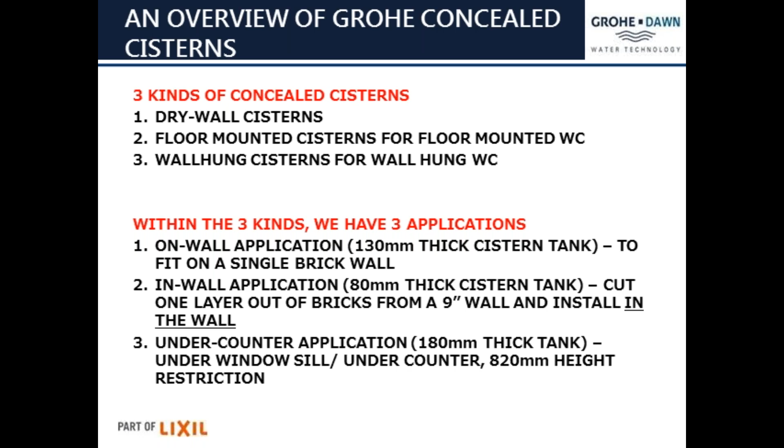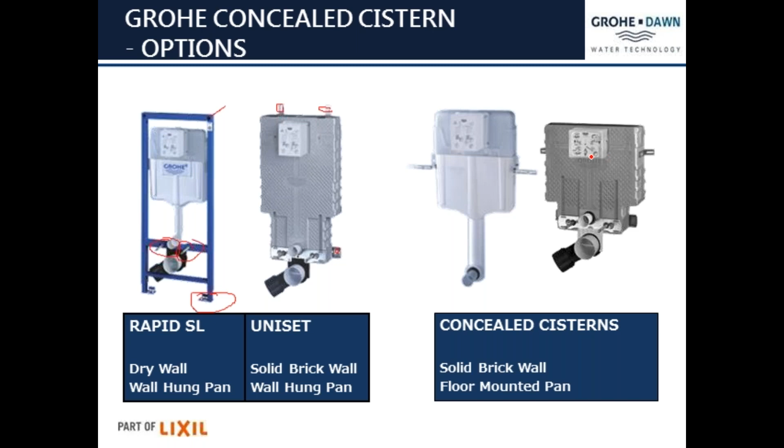Okay, so if we have a look at our Rapid SL frame, we can see that it's a tool-free installation of your inspection chamber. So it's not like the old ones we used to have, where you had to turn screws in and fasten it down and all that type of thing. It simply clips into place.

Then there are only two screws for the retaining frame. So once your tiling or inspection chamber has been clipped into place and it's now being tiled around it, you cut it open, and then you have 2 screws to put your retaining frame on. Also, if you have a look at the 2 brackets, that would then be those 2. It's a perfect quick adjustment with a new wall holder, and it goes very quick.

Obviously, you'll need some tools there. Yes, you'll need some tools to drill it into the wall and so forth, to hang it on, but after that, it is very, very easy. If you have a look on your catalog, that is the catalog Sanitary Systems, Work Smarter. It is on page 61. You'll see the bracket there is a 3855800M.

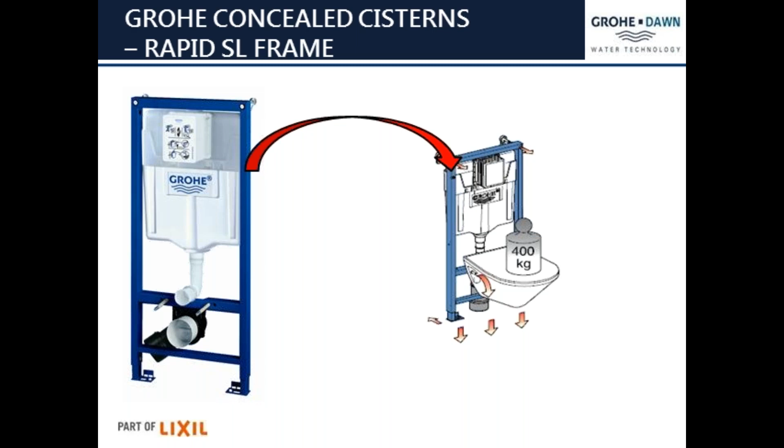As we said, you only have a very limited amount of tooling needed to assemble this holder. Just because it's very easy to mount and clip together doesn't make it any weaker. We've mentioned previously when we spoke about the sanitary ware that a wall hung pan needs 400 kilogram weight put on it to comply with SABS, and your Rapid SL frame complies completely to that.

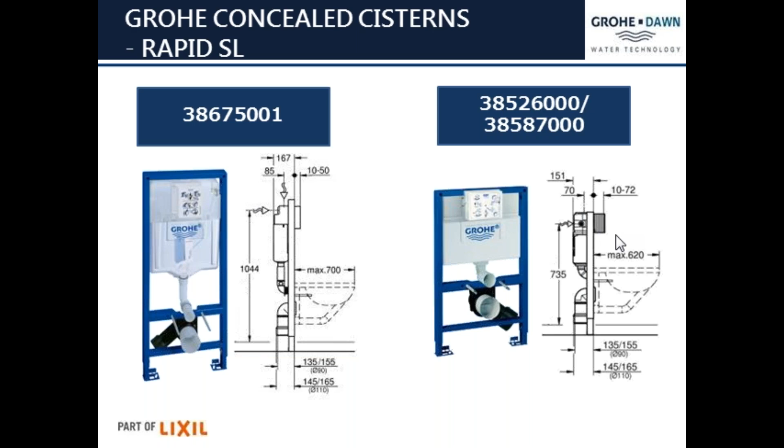So there you can see on your screens the different codes of the different systems that come with a Rapid SL. The one on the left-hand side, the 5001, is the normal 1 meter installation. Then you have your 26000 and 87000, which are your under-basin or under-counter ones, where you can have either a top flush or front flush activation. The 5001, you can only do a front flush activation.

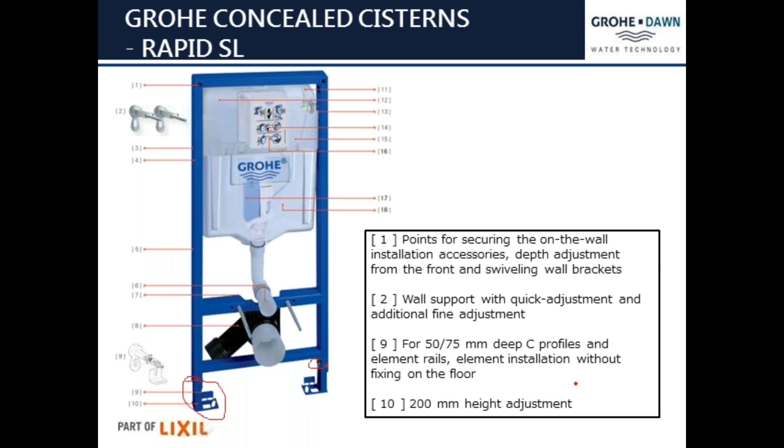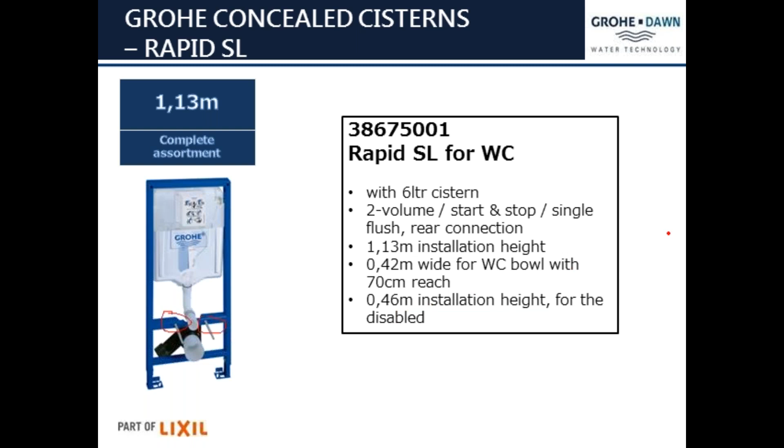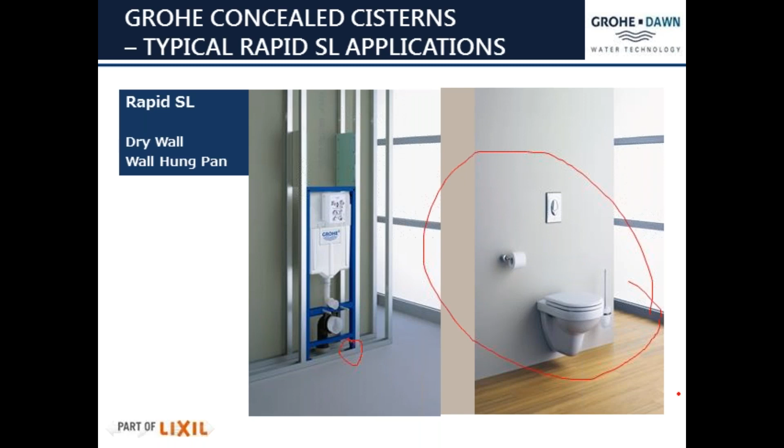But if this was a single channel, then you could actually put a screw or that adjustment kit through to the back wall. Obviously, once you take this whole installation and cover it with a second skin, this is what you will see in front of you. The whole system and the frame, the feet, everything are hidden, and you've just got the wall-hung toilet that now hangs on there.

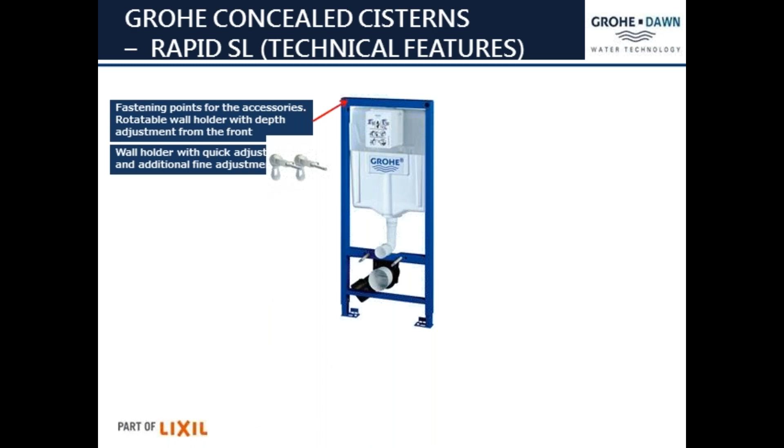So if we have a look at some of the technical features of the Rapid SL system, first of all, you have your fastening points for your accessories, your wall holders to give you depth adjustment and so forth. Those are your depth adjustments with adjustable brackets that give you that quick fix adjustment. You've got sound insulation around your flush pipes and so forth to give you that whisper, so there's not much noise.

And then obviously on your bolts you have got your 400 kilogram load capacity for any of your wall-hung type toilets. You have got your elbow with a 90-degree bend, so it will give you the same as a floor entry or S-type installation.

The frame is coated on the surface with powder coating. This makes sure that you have longevity. It's not going to rust or corrode inside of your drywall area.

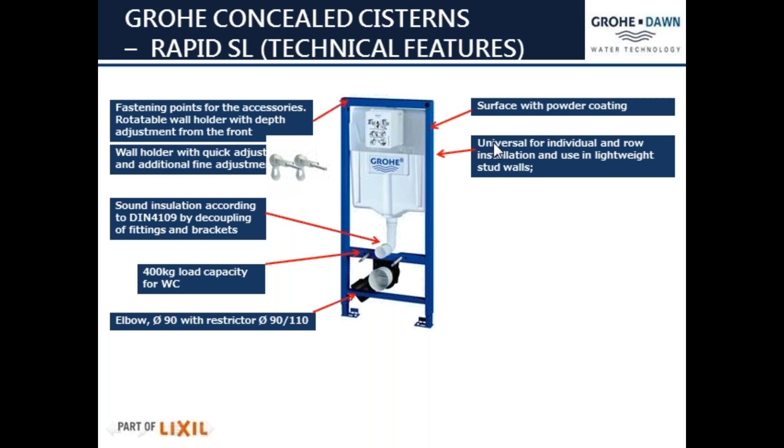So you've got your universals for individual and row installations. On the unit, you've got marks to show you what your standard height should be and where it should line up.

You've also got fastening points for your wood stud partitions and element paneling. We don't really do much element paneling here in South Africa, but we do have some wooden houses, and those would be points where you ideally fasten it onto the wooden studs of the wooden house.

And then you've got your 200 millimeter extra quick adjustment just to lift it that little bit if need be.

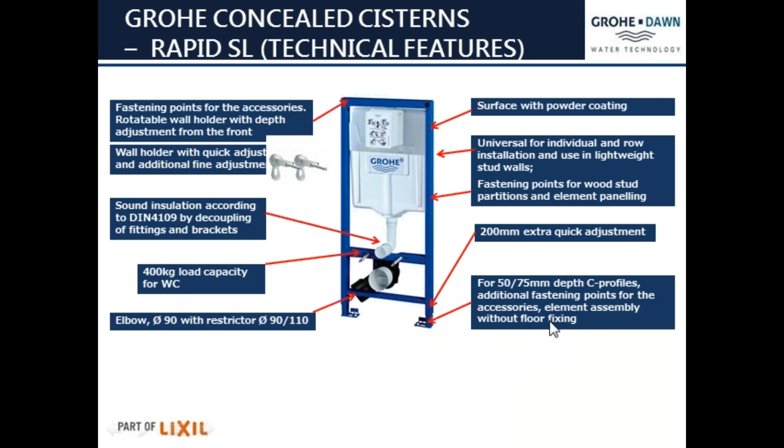Then for your C profiles, as we said, those little feet at the bottom would just clip in and you don't have to screw it down in there at all.

Your filler valve fills up to 6 liters volume in 30 seconds.

Now, I want to give you a cautionary note here. Don't ever tell anybody it takes only 30 seconds or 40 or 80 seconds to fill up, because that is largely dependent on the actual pressure in the system, how dirty the strainers are, all that type of thing. So if you tell the customer it takes 30 seconds to fill, you get customers who stand there with a stopwatch, and if it takes longer, they'll phone the service department and complain that their system takes too long to fill. So rather be very careful specifying how long it will actually take to fill.

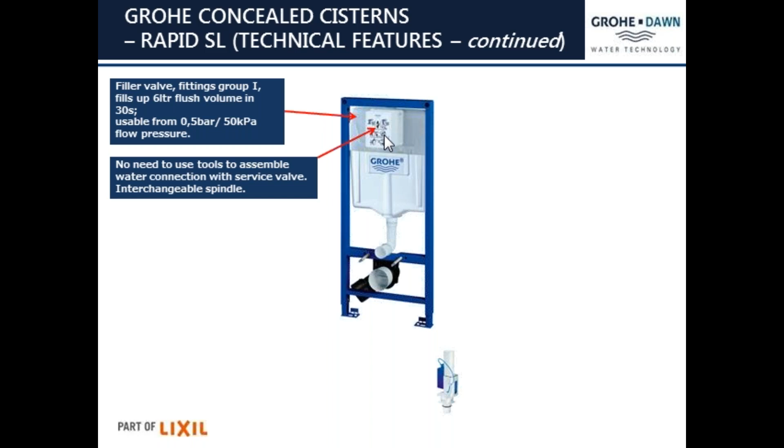So we mentioned that it's a quick fix. You just clip your tiling box inside there, and even the filler valve, the hose that's inside there, is a very quick, easy connection. You don't need a spanner to tighten it at all, you only need to push it in. There's a little O-ring, and then there's a little nut where you can just tighten it finger tight. You don't have to force tighten it there at all.

On your QR code, which is printed on there, it will take you directly to the website with all that information of installation instructions, all that type of thing. I don't know if many of you have worked with a QR code - it's very interesting. If you've got a QR code reader on your phone, you point it at that, get it to focus, and it will automatically take you to the website or whatever area that is pointed to. In this case, it will be to the website, to the professional section, where it'll give you all the information.

So in addition to the 6-litre flush volume, there's always a 3-litre volume available in the bottom. So the cistern can actually take 9 litres of water. You will flush with 6 litres, but it will always have a reserve of 3 litres. So if you need to push the button and hold it open a little bit longer just to get that extra little bit of a flush, there is an extra 3 litres available inside there.

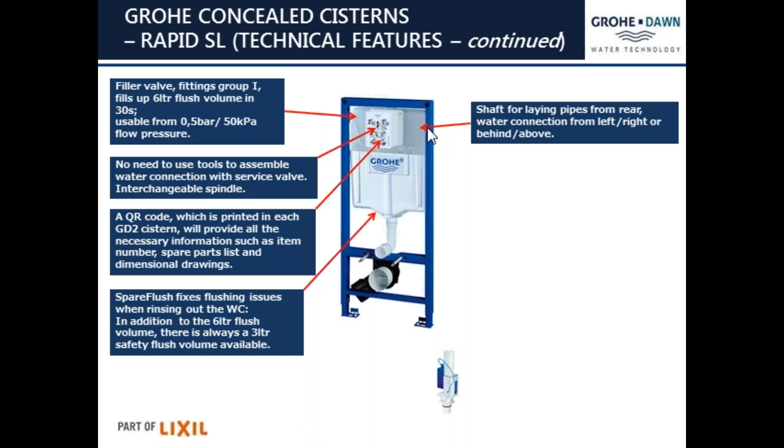You will also see that in your cistern you've got punch holes, so you can actually make your water connection of your filler valve either from the left or from the right hand side, or from the top or from behind. So it's quite flexible in your actual connections on that section there.

Depending on the tile image or design specifications, the toilet actuator plate can be mounted either horizontally or vertically on this particular cistern setup with the Rapid SL here. There are some of the others where you cannot change it at all.

The next one is the inspection chamber, which is locked in place without tools, and the retaining frame is secured with only 2 screws. So once again, very easy to install and to use.

The pneumatic waste valve, or what we know as a beta type valve, has got 3 functions: dual flush, single flush, and a start-stop function. So it's very nice if you accidentally push the full flush and all of a sudden you want to stop it because you realize you don't need the full flush - you can interrupt it and it will stop.

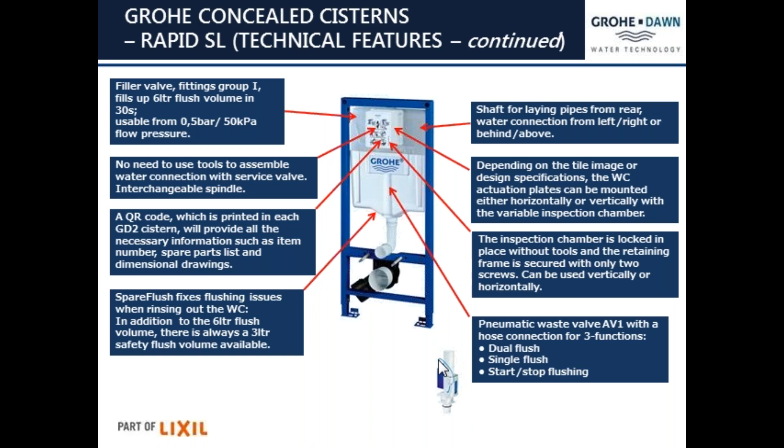The Rapid SL for the under counter or under windowsill installation - there you can see what it typically looks like. In this case it's an under counter, mounted up against the wall, with a false bulkhead of drywalling built in front of it, so it's still a normal wall hung installation with a little ledge behind the toilet. This could also apply where there's a window opening just above the toilet - it would be very similar.

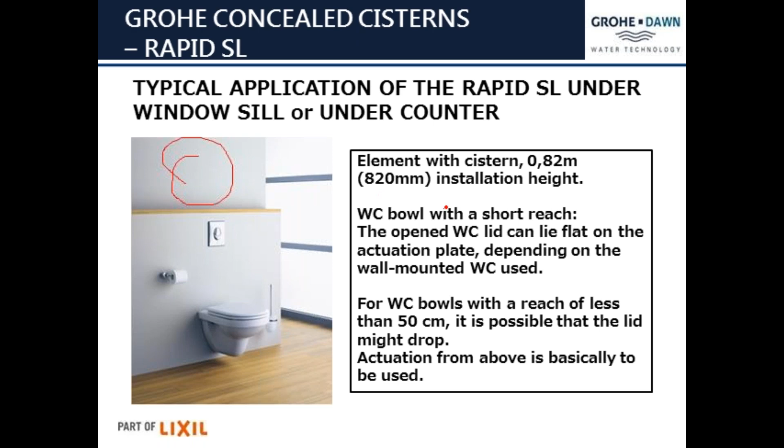A quick question here: on a wall hung pan on drywall, which cistern would you use? And there it is, your Rapid SL. This one is the 0.82 meter installation, so this would be an under counter, top or front flush - you would use this one here.

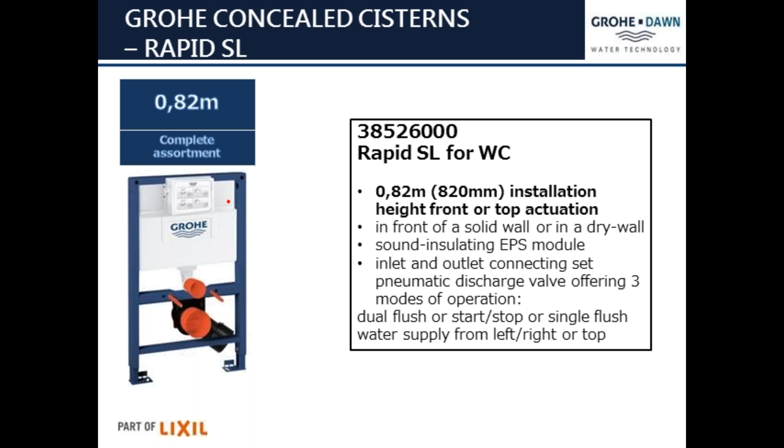You'll see this one has got the bigger foot at the bottom. The rest of the cistern looks exactly the same, with the same features - just the foot is bigger, and that would be for a different drywall sectional installation.

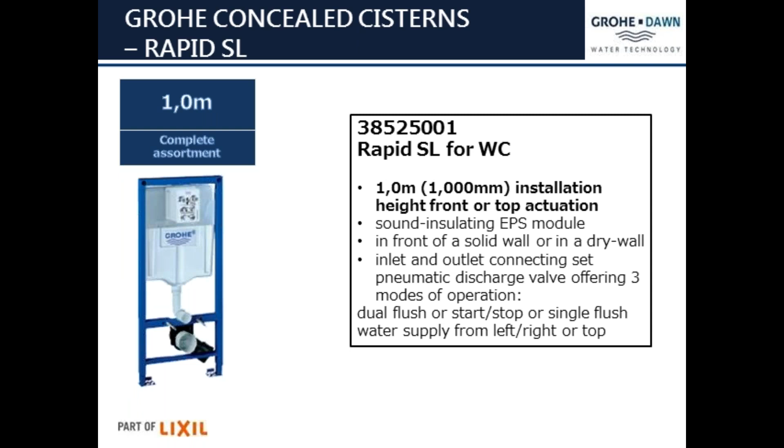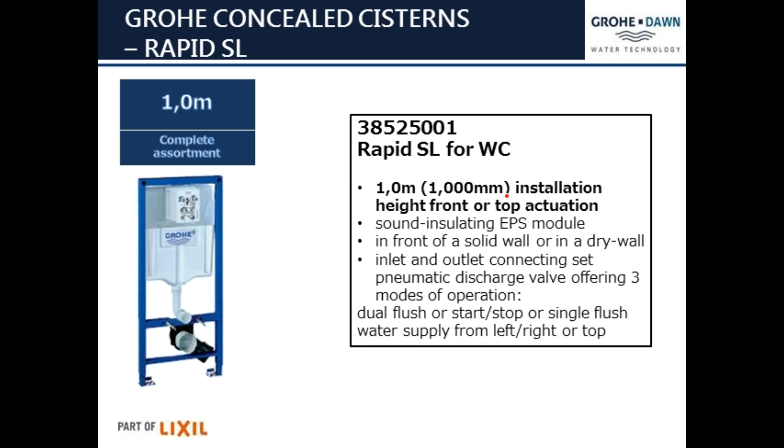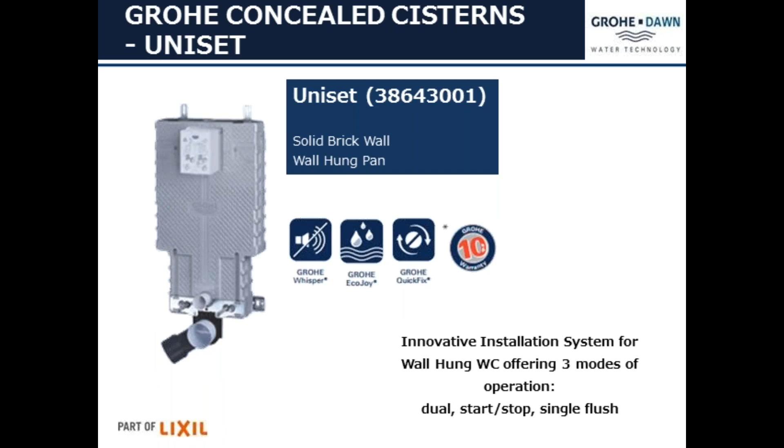That is your Rapid SL ones. Here you'll see it has got a foam on it, so you could screw this onto the wall and put a brick up against it and tile directly over the front of this. Your tiling adhesive would stick directly to that. These also have the USPs of being GROHE Whisper, so it's very quiet, the EcoJoy, and the QuickFix.

What's nice about this one is this section here has got a screw there and there. So once you've installed it, if the toilet pan doesn't quite line up to where it should, you could loosen that and it will move. You can line it up, lock those 2 screws again, and then mount your pan on that. That's a very nice feature - we know things often don't go exactly as intended in an installation, so it could be slightly off, but we've got a way of fixing it on this one.

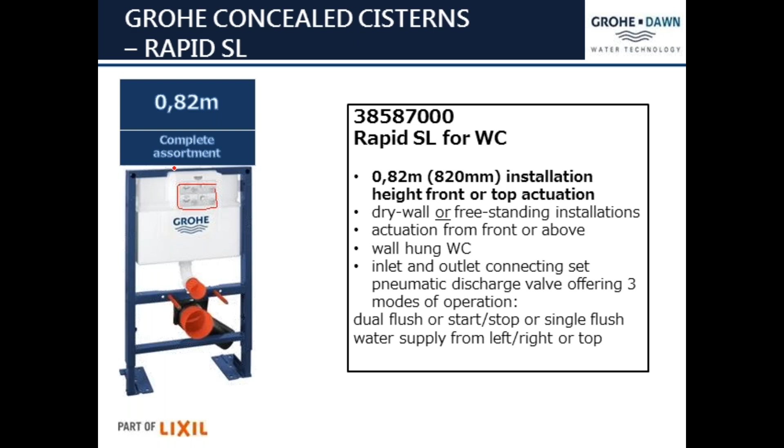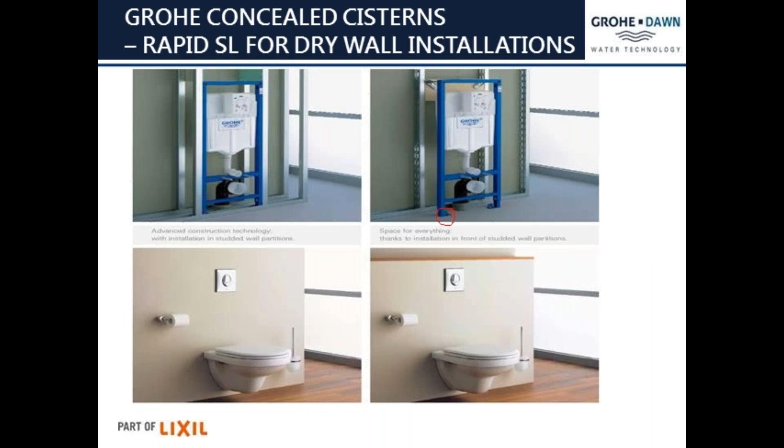There's been a question about top and front flush, which I take applies to the previous Rapid SL. So on the under counter ones, if we go back to that again - you can actually put your actuator plate on the front, or it has a feature that lets you mount it on the top and flush from there. Going back to this picture, you can see the ledge, and it would be able to flush from the top, where this wooden ledge is - you can go in from that section.

With the cisterns, your adhesive may not stick totally to that because it could have a bit of powderiness or whatever on there, so you'll most probably need to put a key coat or bonding material on there so it sticks directly to that polystyrene, but you don't have to put an extra mesh or anything on that.

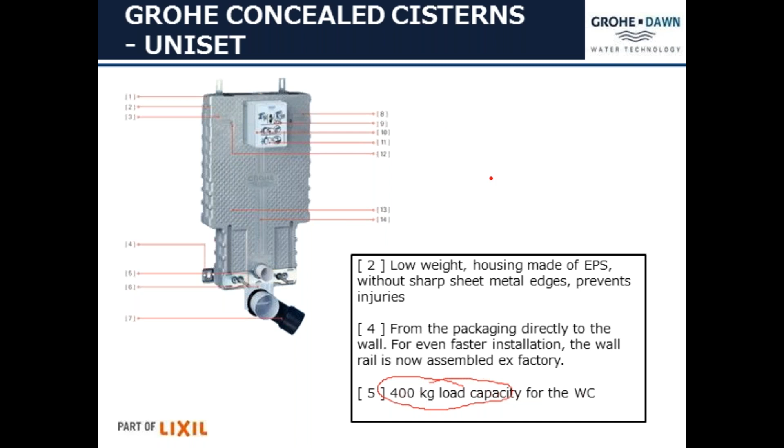So this one is much easier to move around - obviously it's lighter, it doesn't have the steel frame. You can take it directly from the packaging and put it directly onto the wall, screw it on. It still has the 400 kilogram load capacity, which we spoke about for the Rapid SL, so with this installation it is just as strong as the one in the steel frame.

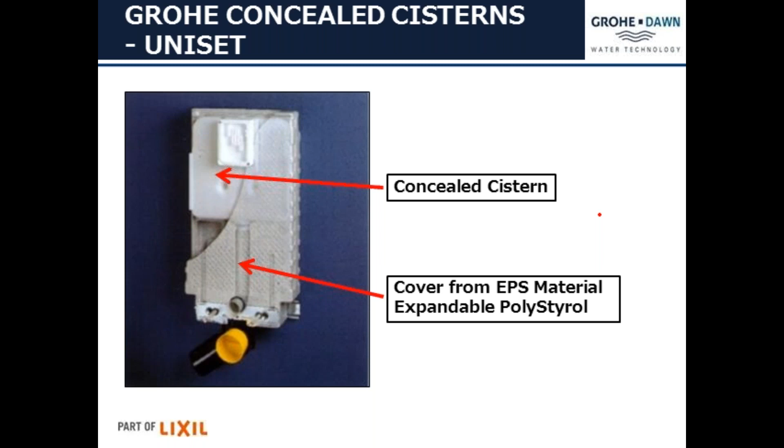So you've got your concealed cistern there, which is then covered with your EPS material. If anybody doesn't know what EPS is, it's expandable polystyrol, a type of polystyrene they make this out of. It gives you sound deadening and also works as condensation absorption, so it wouldn't condensate water onto the tank and come through the wall. It would be stuck behind that expandable polystyrol.

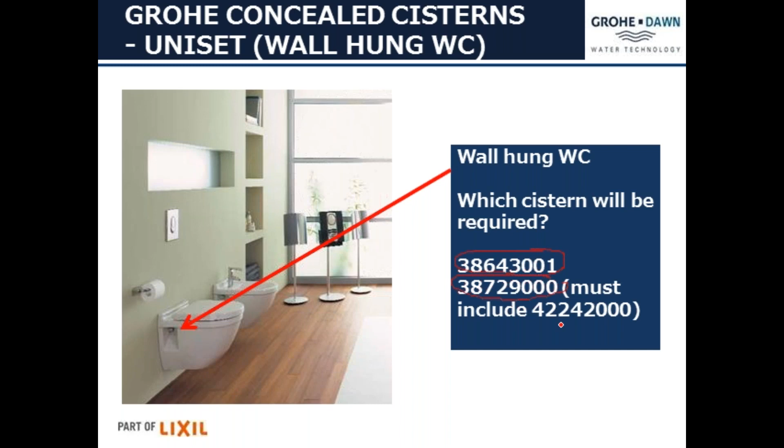So there you have it, your wall-hung toilet. On this one, if it's the Uniset, that's the toilet cistern you're going to use, but you must include your 4224 2000 with it. So there are your Uniset ones, the 3 different versions.

I've been corrected, it's not top and front activation. Apparently you guys like to call it vertical and horizontal. In the language of plumbers, I think that means the same, but to be technically correct, we'll refer to them as vertical and horizontal installations.

Just one question, yeah, one sec.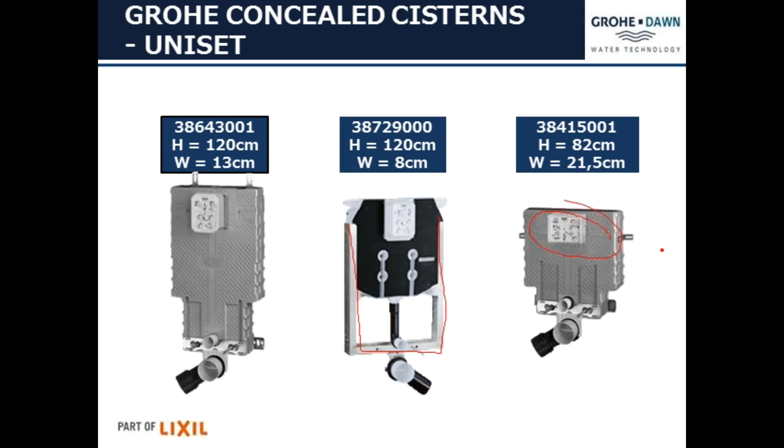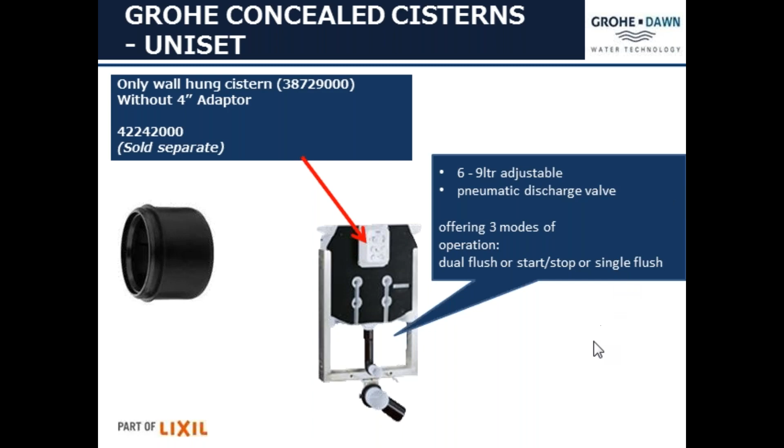So there your cistern is, without the 4-inch adapter. This 4-inch adapter, to change it from the 90mm pipe to the 110mm, you've got to buy separately. It comes with a 6 and 9 liter adjustable pneumatic discharge valve, and it has the dual flush, single flush, and start-stop option.

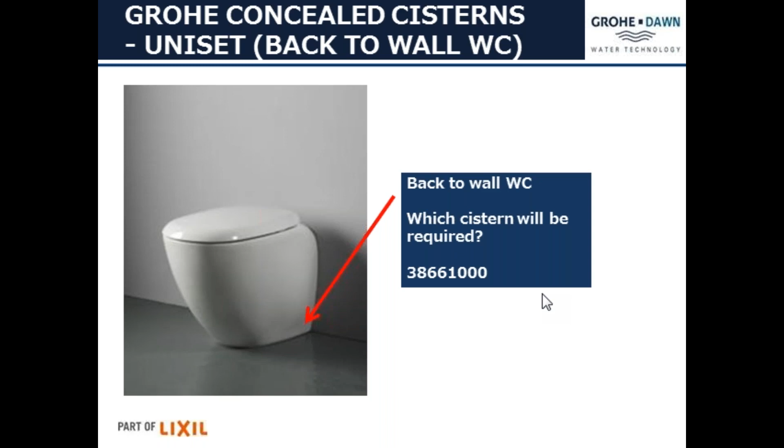If we have a look at the back to wall toilet pan, that now stands directly on the floor, so it doesn't need the assisted weight bearing of a wall hung toilet because the weight is carried on the floor. For this one we would use cistern 3866 1000, this normal GROHE concealed cistern, and again you have your 3 different options, on-wall, in-wall and under-counter.

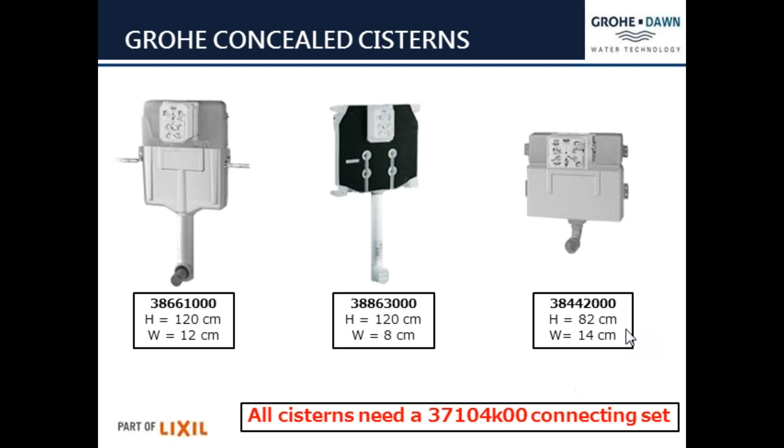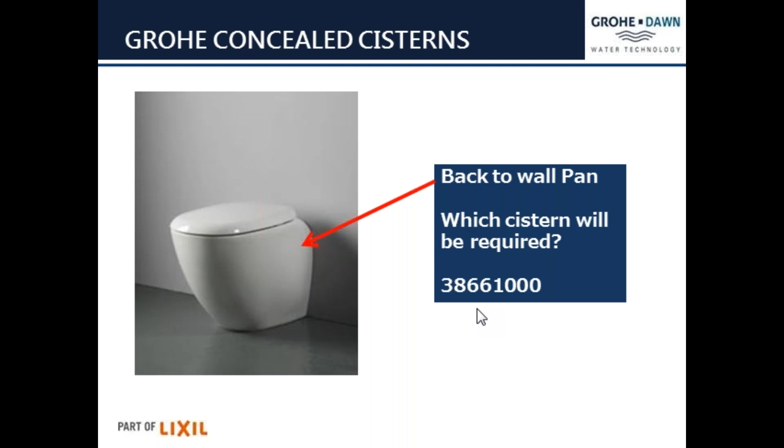Just keep in mind that on all of them you need the 37104K00 connecting set, which is on your flush pipe section. So there we've got it. Again, for those that missed it, the cistern you can use on your back to wall pan would ideally be your 3866 1000.

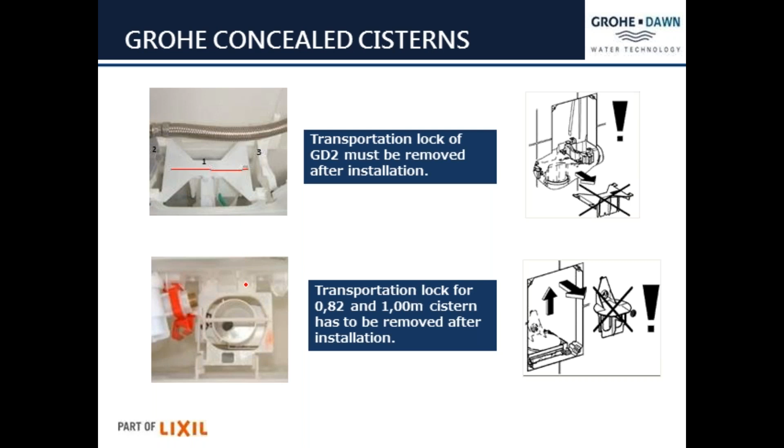Just some items to keep in mind. Once the plumber has finished installing the cistern, the biggest service call we have is people phoning saying it doesn't work. 99.9% of the time they haven't taken this transportation lock out at all. So once it's installed, the transportation lock needs to be taken out, and only then will your flush mechanism work properly. For all of them, please make sure the transportation lock has been removed.

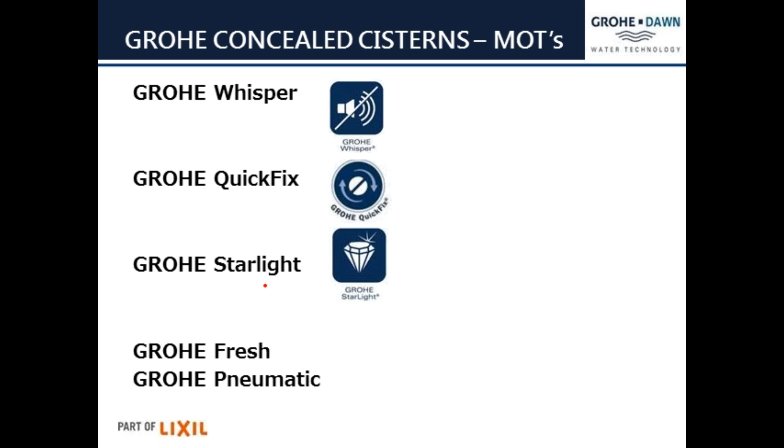Ladies and gentlemen, I hope that has made it clear as mud, or just like slightly murky water. We have tried to summarize it without going too technical in this session. There are a lot more technical slides which will go into installation heights, depths, special conditions, all that type of thing, but we'll be dealing with those in version 2, in sales training 2 point whatever it will be then.